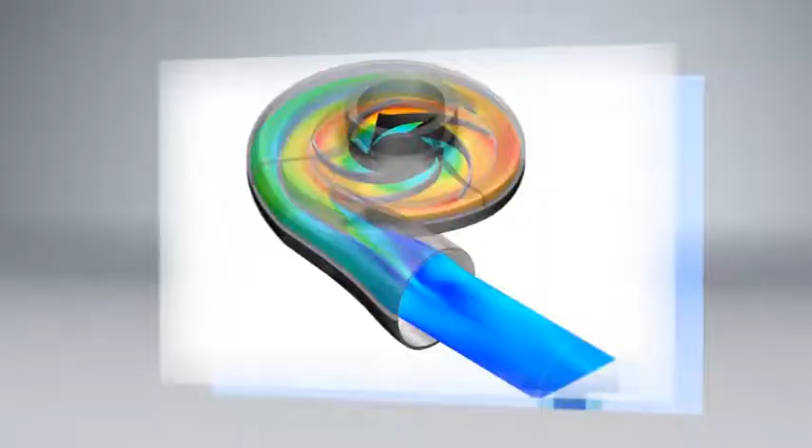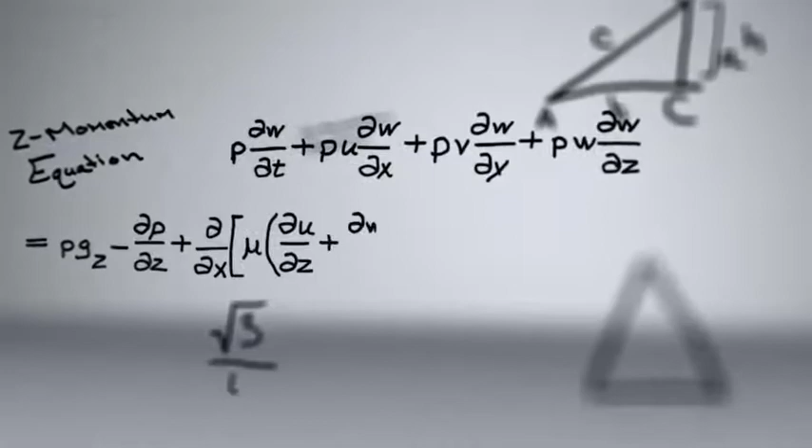One of humanity's greatest challenges has always been to understand and harness the power of the elements, the strength of wind, and the force of water. This quest inspired history's greatest minds to develop the science of fluid dynamics and its equations. These equations are nothing short of genius and extremely difficult to solve. They're so complex, in fact, they cannot be solved by hand.

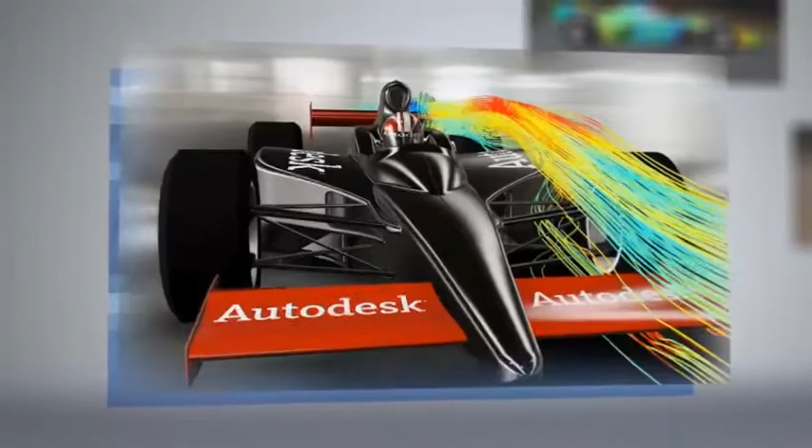This all has led to a software revolution that uses methods and algorithms to predict how liquids and gases behave and how they work with the products we design. In the design world, we call this computational fluid dynamics, or CFD for short. Fluids affect the performance of almost every widget, device, and structure. CFD is an important part of the design equation and helps boost energy efficiency, reduce risk, and spark innovation.

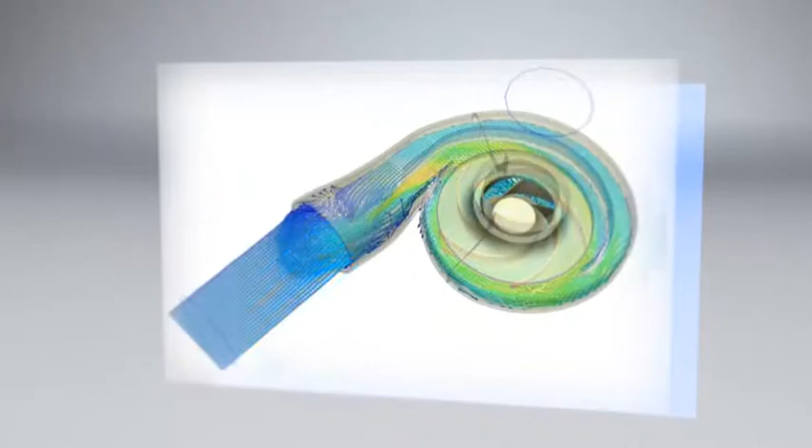Fluids are always a serious factor. It takes energy to move a car down the highway or to pump water through a pipeline. By understanding the forces and effects of fluid dynamics, you can make the critical design decisions that reduce energy consumption and improve efficiency. Products, vehicles, and structures often fail due to miscalculations or judgment errors of fluid behavior.

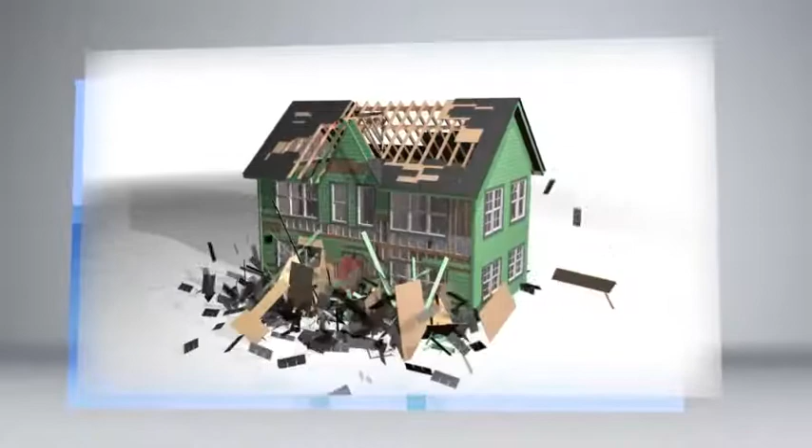We hear about these malfunctions all the time. Computers overheat, car parts fail, structures collapse in high winds. The result is recalls, lawsuits, or worse, loss of life. By running CFD analyses throughout the design process, you can solve these issues before they turn into serious problems.

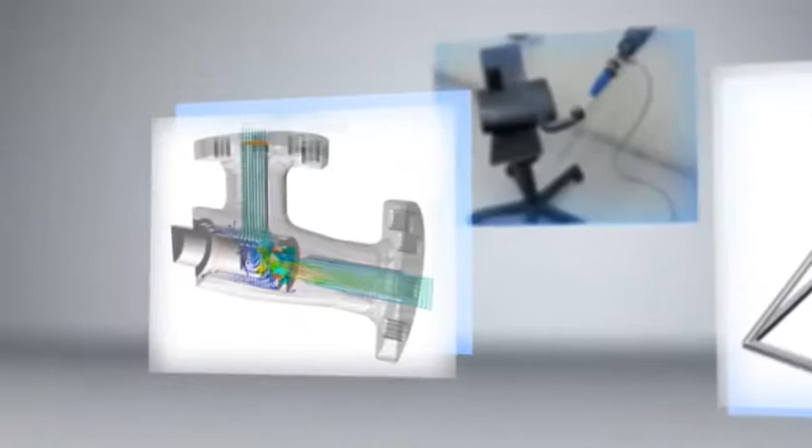Costly physical prototype testing provides discrete pieces of test data. CFD analysis shows you the complete view of the flow. This insight inspires questions and critical thinking that produce innovative design. Fluid flow is the study of how liquids and gases move in and around solid objects. Heat transfer is the study of how things heat and cool and the cause of these temperature changes.

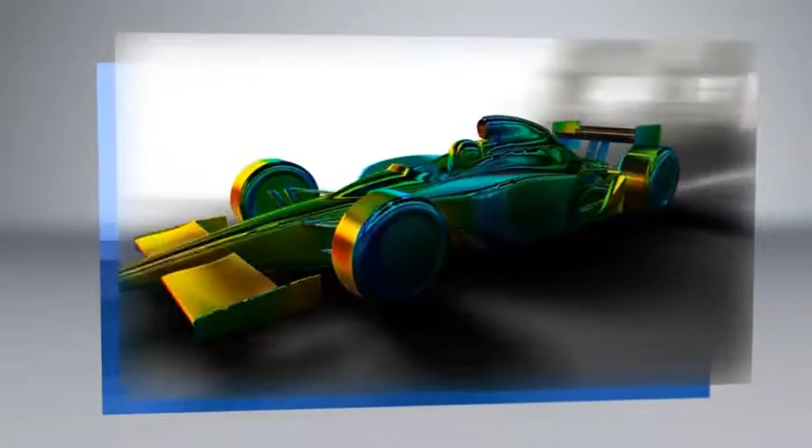With CFD analysis, you can understand the flow and heat transfer throughout your design process. A few examples include wind resistance of a car or motorcycle, pressure drop through a water valve, component temperatures in an electronics enclosure, comfort of people in a crowded meeting hall. And that's just the start. CFD analysis should be used throughout the design process to gain insight and to make good design decisions. Let's follow a project timeline with CFD.

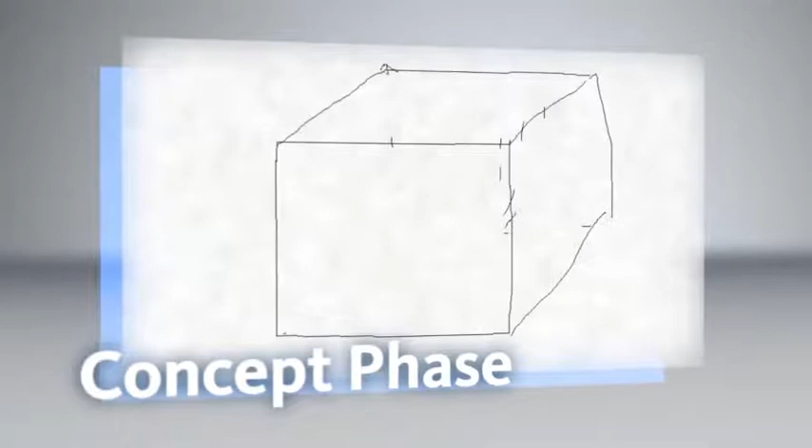Let's say you get an assignment from a client and right away you have an idea, a seemingly groundbreaking solution. You think it will work, so you mock it up and run a CFD analysis. You learn some things, you get precise information. You land on a concept that will drive the next big thing. As you work out the details, you must consider every question carefully. You iterate through each alternative and select the best.

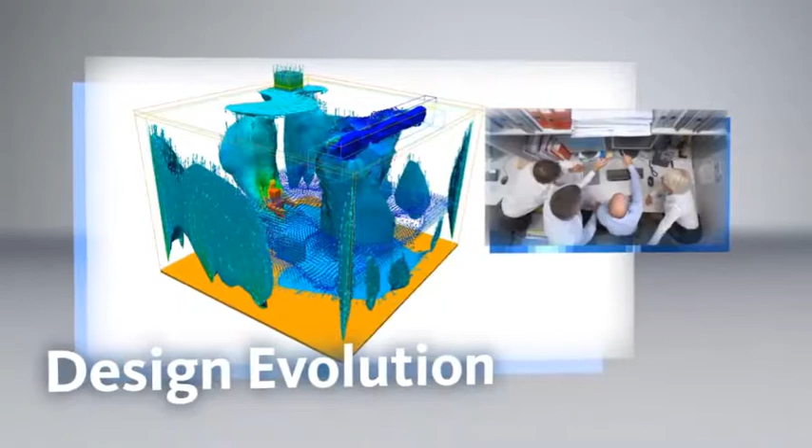Each analysis unlocks a secret that will make your design better. Finally, you analyze a detailed model to check that it all works as designed. You spot an issue. You fix it, then rerun to make sure it's fixed. The result is a high-quality product delivered on time. Your customers are happy and you're ready for the next big challenge.

Now that you've had the rundown on CFD, take a look at the tutorial videos. Start seeing the benefits of simulating in your workflow.